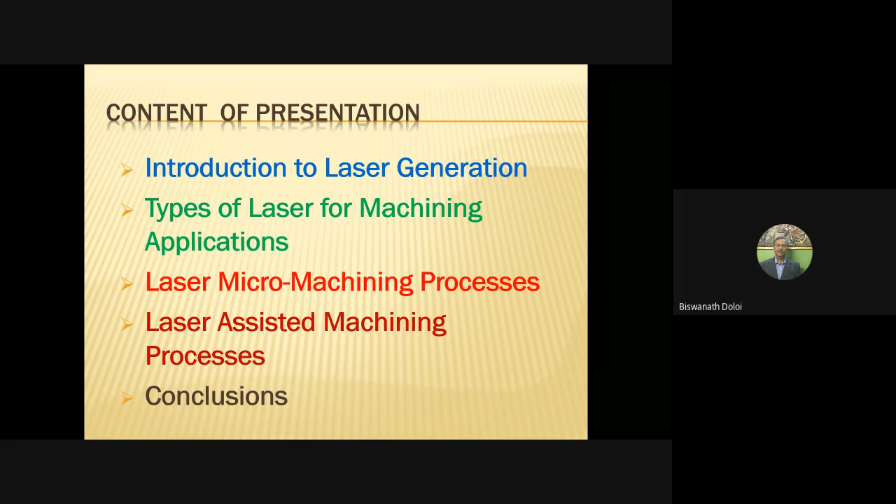So the topic of my presentation is recent advances in laser beam machining. Now, content of my presentation: first, introduction to laser generation, then I will discuss various types of laser for machining applications, and then various laser micromachining processes, laser assisted machining processes, and finally conclusion. Now I will discuss briefly the fundamentals of laser and laser generation.

So the full form of laser is Light Amplification by Stimulated Emission of Radiation. We know laser light is a beam of photons, and it is coherent and monochromatic, and highly directional, and it has high brightness with very high power intensity. A laser beam

is basically useful for machining purpose, and it is nothing but the emission of radiation, basically emission of photons, a beam of photons, in a narrow coherent beam which consists of a single wavelength in the visible, infrared and ultraviolet region of the spectrum. So laser may be IR laser, infrared laser, or ultraviolet laser. It is basically a coherent and monochromatic beam of photons.

Now, laser beam and ordinary light beam are different. Laser light is coherent and monochromatic in nature, but ordinary light is incoherent and emits in almost all directions, usually over a wide spectrum of wavelength. So laser beam is monochromatic, that means it has a single wavelength, but ordinary light emits over a wide spectrum of wavelength. So that is the difference. Ordinary light is not monochromatic, but laser light is monochromatic and coherent.

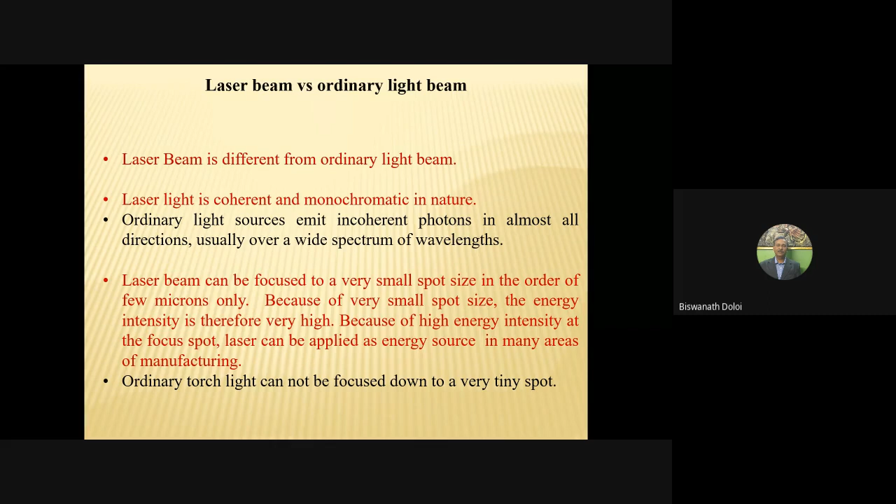But ordinary torchlight cannot be focused down to a very tiny spot. So if you want to focus the ordinary torchlight, then it will actually diverge. But the laser light can be focused over a long distance, and its angle of divergence is very, very less.

So if you go through the fundamentals of laser generation, there is some lasing medium which, when it is excited—excited means when it absorbs energy from a source of excitation—then it is excited and goes to the higher energy state, higher energy level.

At the higher energy level, the excited state, the lasing medium cannot stay for a long time. So after a certain time, it will go to the metastable state or ground state, and when it comes back to the ground state, it emits a photon, emitting energy in the form of photon. So the lasing medium may be different for different types of lasers.

For solid state lasers, neodymium, erbium, or ytterbium are the lasing medium. When this lasing medium absorbs energy, it absorbs it from the optical source or from the discharge energy, and goes to the higher energy level when excited. But when it comes back to the ground state, it emits energy in the form of photon. These emitted photons have a constant phase difference and are monochromatic. That's why it is a laser beam.

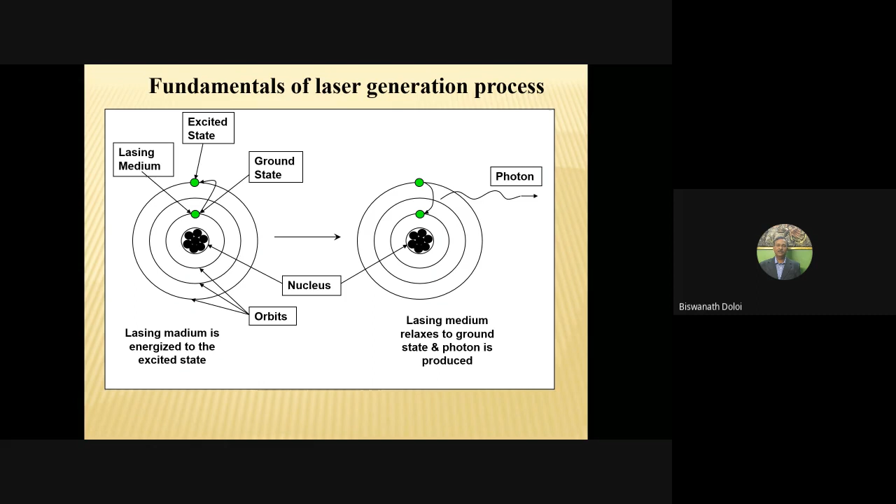So the fundamental principle of laser generation is almost the same for all lasers, whether it is a solid state laser or gas laser, but the excitation mechanism is different. All lasing mediums should be excited, otherwise you cannot get energy or a beam of photons with special properties, that is laser. Now if you want to apply this laser for machining applications, what are the requirements?

Laser is generated, but it should be moved between two mirrors. This is basically the optical resonator. One is a fully reflective mirror with 100% reflectivity, and the other is a partially reflective mirror. This beam of photons oscillates between these two mirrors, its energy increases, and finally it comes out from the partially reflective mirror, and then it is focused by means of a lens.

The lens is mainly used for focusing purposes. If you focus it, the spot size at the focal point is very small, and the energy per unit area, that is the energy intensity, is very high. This laser beam should be focused on the workpiece surface to utilize its energy.

For machining applications, you have to move the workpiece along the XY direction, and for focusing purposes the lens can move along the Z direction. The workpiece is placed on an XY table, controlled by a CNC controller. So this is the laser generation as well as the machining system, but the lasing medium may be different, or the source of excitation may be different.

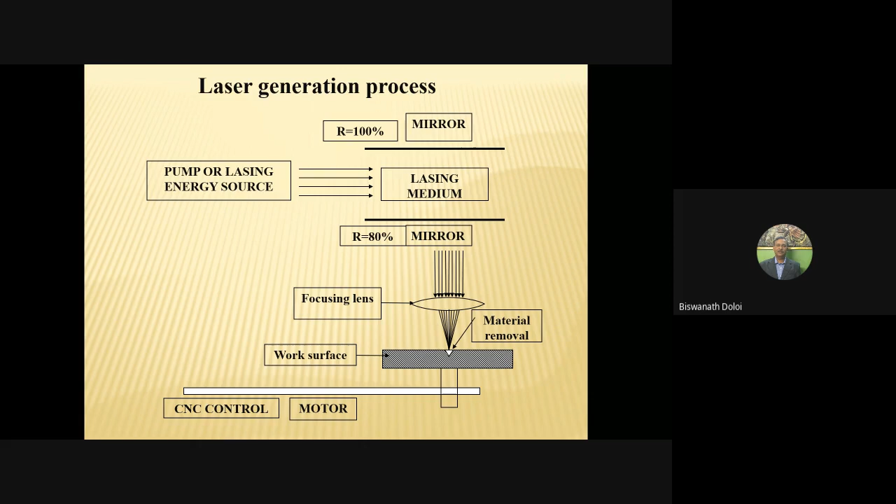This is basically the solid state laser, but for gas lasers electrical discharge is required between the anode and cathode, and from there the energy is utilized to excite the lasing medium. For CO2 laser, CO2 gas molecules are to be excited, and for that you require a discharge cell, electrical discharge cell, cathode, anode, etc. I will discuss this later.

Now if we quickly go through the background of laser generation: in 1917, Einstein showed that lasing action should be possible in his paper on the quantum theory of radiation.

Gordon Gould was the first person to use the word laser, in 1959. He is the person who uttered this term, laser. In 1960, Dr. Theodore Maiman invented the first ruby laser. This is the solid state laser.

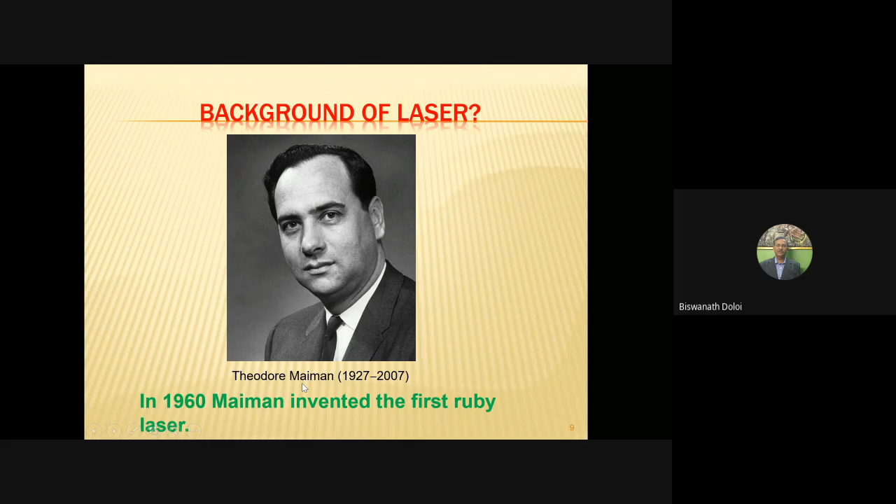Thereafter, a lot of development happened in the late 70s: YAG lasers with power in the order of 100 watts, and the CO2 laser. This CO2 laser was developed by Dr. C.K.N. Patel at Bell Lab. CO2 laser has high power, 1000 watts.

In 1970, the first continuous wave diode laser was developed, with less power. This semiconductor diode laser is used in printers as well as in pointers, also developed in 1970. Then in the late 1980s, fiber laser technology was available using erbium doped single mode fiber. Erbium is the lasing medium here. For CO2 laser, CO2 gas molecules are the lasing medium. For Nd:YAG laser, Nd, neodymium, is the lasing medium.

Lasing mediums are different, and gradually lasers are no longer treated as laboratory research equipment. Laser manufacturing has become a multi-billion-dollar industry. Gradually laser is applied in many fields of manufacturing, such as inspection, measurement, testing, medical device fabrication, material processing, and surface treatment of diverse range of materials, from plastic to diamond, metal, glass, ceramic, composite. All materials can be machined or processed by laser, and the list of applications is endless.

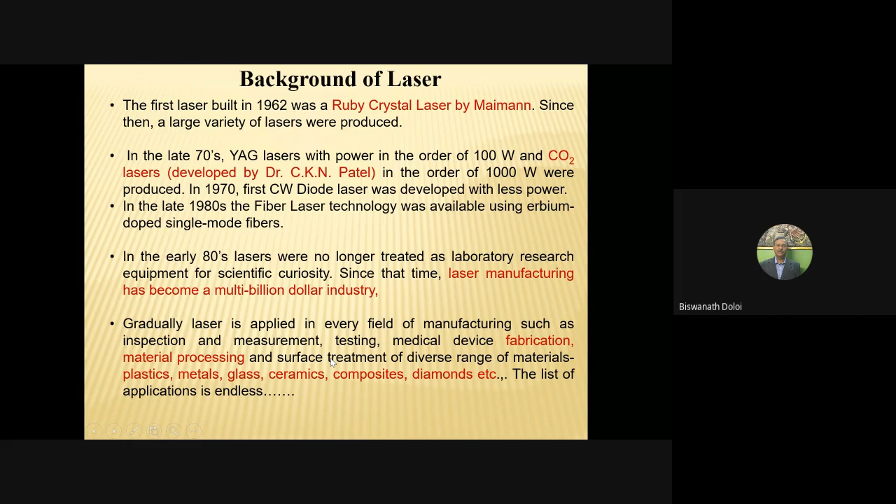Now, for different manufacturing applications, we require different laser beam intensity. As I told, laser intensity means laser power per unit area, watt per centimeter square.

For machining, you have to melt the material and vaporize the material, so we require high power and high power intensity. For machining, we require 1.5 multiplied by 10 to the power 6 to 1.5 multiplied by 10 to the power 8 watt per centimeter square, that is 10 to the power 6 to 10 to the power 8 watt per centimeter square. Here, melting and vaporization, sometimes laser ablation, means you directly vaporize without melting. The energy intensity is so high that some materials are directly vaporized from solid. So without melting, the vaporization of material from solid, that is laser ablation, which is also a material removal mechanism when you are machining or removing material.

So for machining, we require high power intensity. But for welding, where we are not removing the material but joining it, the materials are in the same molten state. For that, we require comparatively less power intensity, that is 1.5 into 10 to the power 4 to 10 to the power 5 watt per centimeter square.

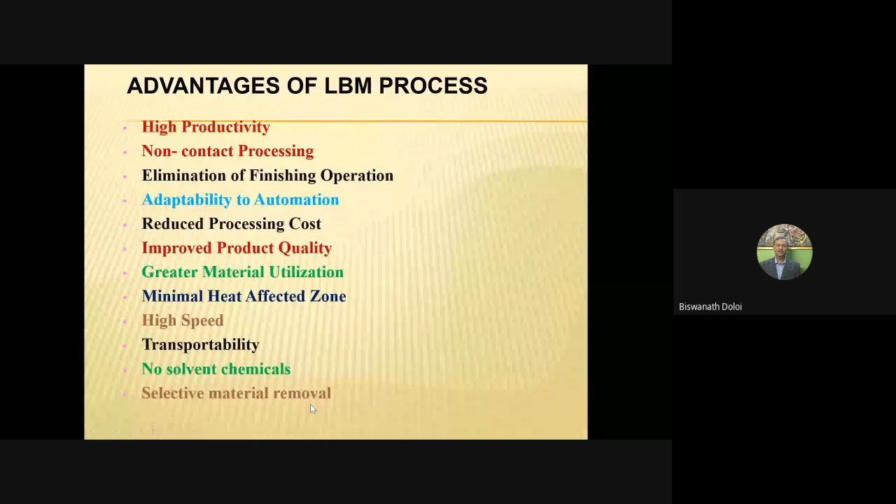So these are the advantages of laser beam machining. Now these are the general applications.

So it can cut very hard material like diamond. So diamond jewelry industries, laser machine is applied. Then it can be useful for fabricating IC or printed circuit board, and it can be used for processing nuclear fuel rod, cutting of nuclear fuel rod.

Then non-machining application like welding is also another application, and it has wide application in pointer, printer, plotter, etc. Now medical device fabrication, laser has wide application, cutting of stent, fabrication of stent, marking on stent. So laser has wide application in medical industry.

Now, as I have told you that laser beam is a source of energy, so it can be applied for heat treatment, surface hardening, alloying, cladding, cleaning, etc. And I will mainly focus on micro machining applications, micro drilling, micro cutting, micro grooving, micro turning, thread cutting.

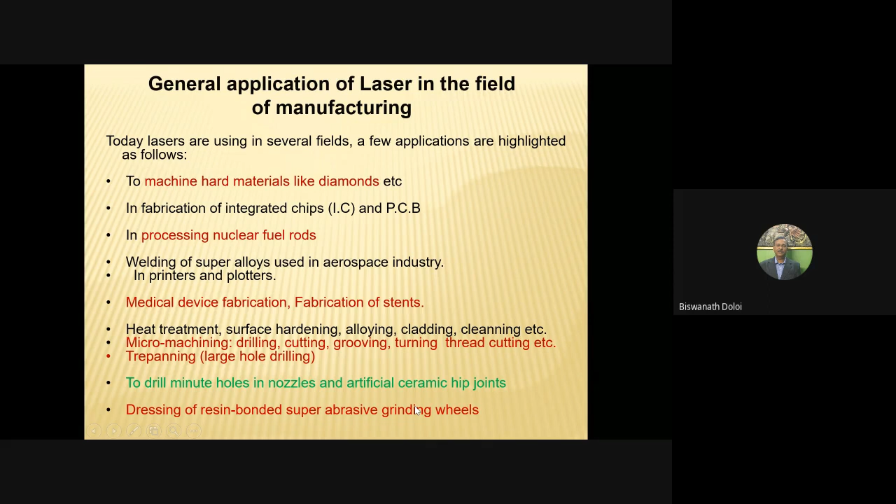Not only for micro hole generation, it can be useful for large hole generation, that is trepanning. And it can be applied for drilling minute hole in nozzle, fuel nozzles, and also it can be useful for turbine cooling hole, etc. And artificial ceramic hip joints, it has wide application. And it can also be applied for dressing of grinding wheel. So these are the general applications in the field of manufacturing, machining, as well as non-machining applications.

Now, material removal mechanism. So for laser beam machining, the laser radiation is first absorbed by the material surface. So material should absorb the laser energy. Otherwise, it will be useless. So the material should absorb the laser radiation, or it should absorb the energy of the laser beam. Then only its temperature will be increased. And if the temperature is above the melting point, then it will melt and then it will vaporize.

So melting vaporization is the mechanism for long pulse laser, that is microsecond pulse duration laser or millisecond pulse duration laser. Now here another thing is very important, that the thermal properties, absorptivity, reflectivity, transmissivity, these properties are very, very important. As laser beam machining is an advanced non-traditional machining process, here mechanical properties are not important. Mechanical properties, say ductility, toughness, etc. of the material are not important.

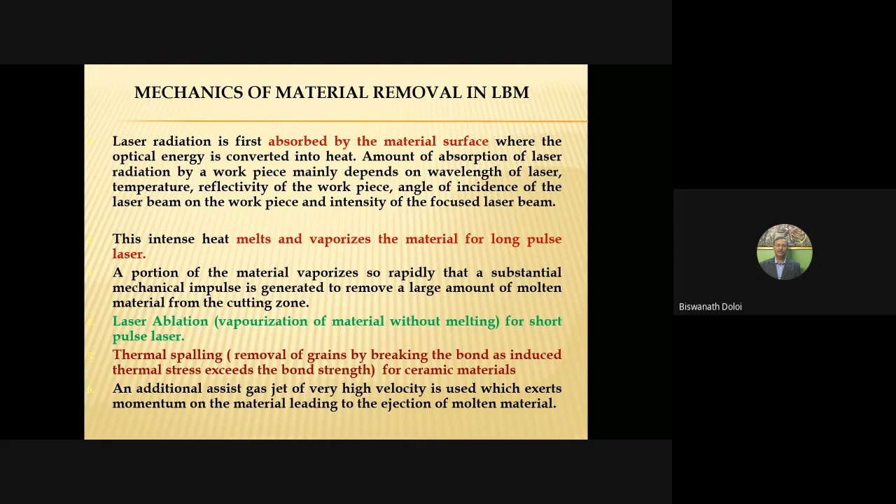To avoid this, when the material is melted, it should be immediately removed. So for that we supply the assist gas jet. These are the material removal mechanisms: mainly melting, vaporization and ablation, and for ceramic, thermal spalling.

Now here you see, this is machining with long pulse laser, where the pulse duration is long, millisecond or microsecond. Then there is melting, so a lot of thermal related problems occur: micro cracks, heat affected zone, damage to the adjacent layer, recast layer, resolidified layer. So this is not desirable.

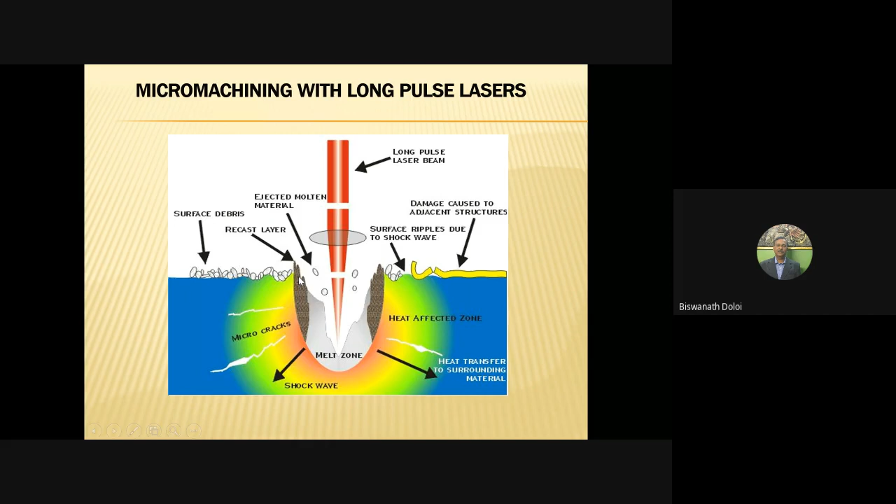But if you go for a very short pulse laser, the pulse duration is very short, but the energy intensity is very high, peak power is very high, because there is a relation that peak power equals average power divided by the product of pulse frequency and pulse duration. So if the pulse duration decreases, peak power increases, meaning gigawatt range, kilowatt or gigawatt, megawatt or gigawatt range.

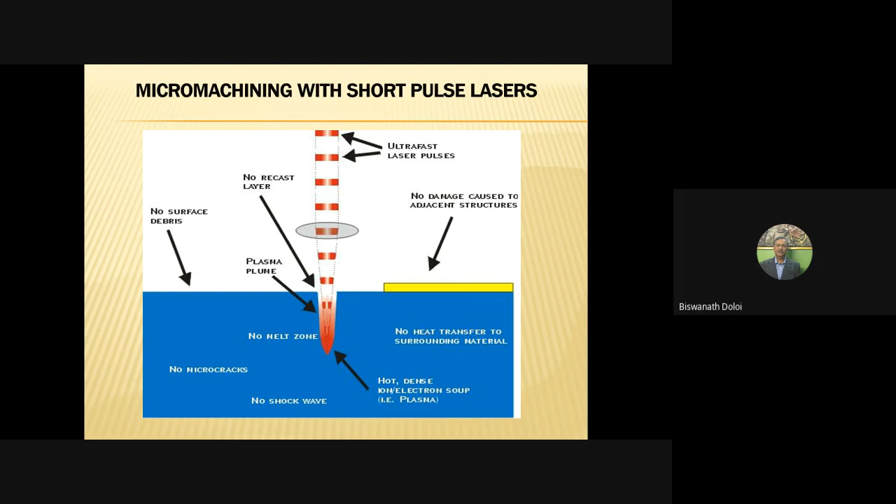So gigawatt range power for very short duration, nanosecond or picosecond or femtosecond, means there is no time to melt - directly the solid is vaporized. So no melting means no melt zone, no micro crack, no thermal damage. All the problems are eliminated when you are using a short pulse. So selection of laser is very important when going for machining, especially micro machining applications.

Now I will discuss different types of lasers. Nd:YAG lasers - Nd means neodymium, this is the lasing medium, doped in YAG crystal, yttrium aluminium garnet. This laser has excellent properties like high peak power, good focusing characteristics, small pulse duration and small wavelength - here wavelength is 1064 nanometer. This is a solid state laser, and it can be transported by fiber optics cable.

This laser system integrated with CNC control has great potential for wide use in machining applications. So we are mainly focusing on machining application. Nd:YAG laser can be used for micro drilling, profile cutting, marking - marking is by removing the material, basically marking by machining.

And groove, micro grooving - you can produce a groove of micron width or micron depth. And then turning, laser turning, so you can remove a thin layer or micron layer of material from the cylindrical workpiece. That is laser turning.

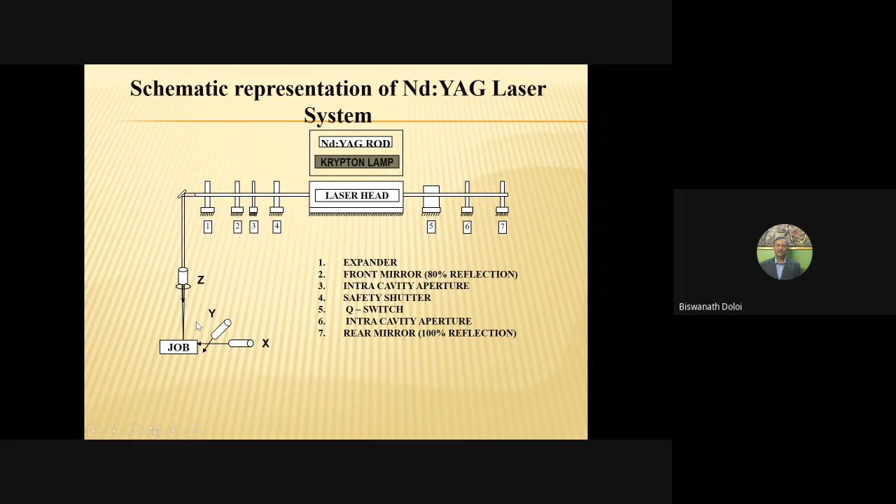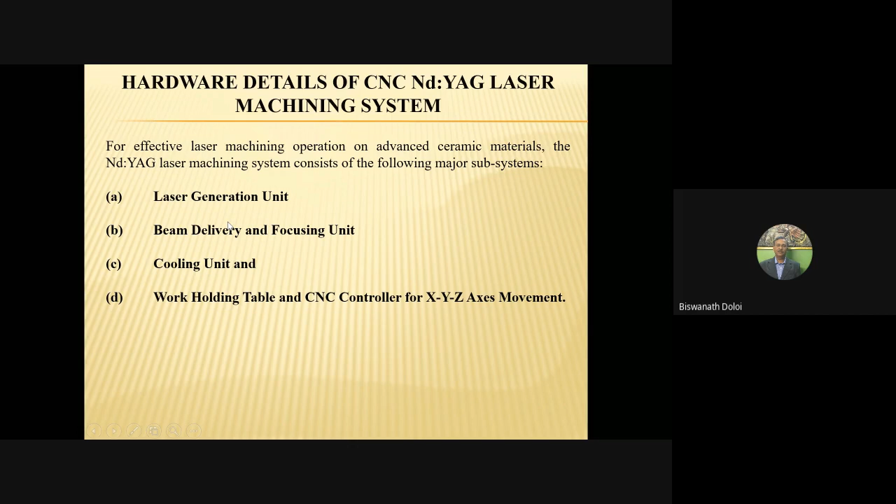Now every system has this type of arrangement: laser generation unit, then beam delivery, beam bender or focusing unit, and cooling unit. Sometimes for high power laser we require a water cooling system; for low power laser we require an air cooling system. And work holding table, CNC controller for X, Y, and Z axis movement. These are the requirements for the CNC laser machining system.

Now for laser generation, this is actually that lamp pumped laser generation system. So Q switch is there for pulsing, and this is a Krypton arc lamp controller. It will control the average power, and we can control the pulse frequency. For this system, pulse duration is fixed at 120 nanoseconds.

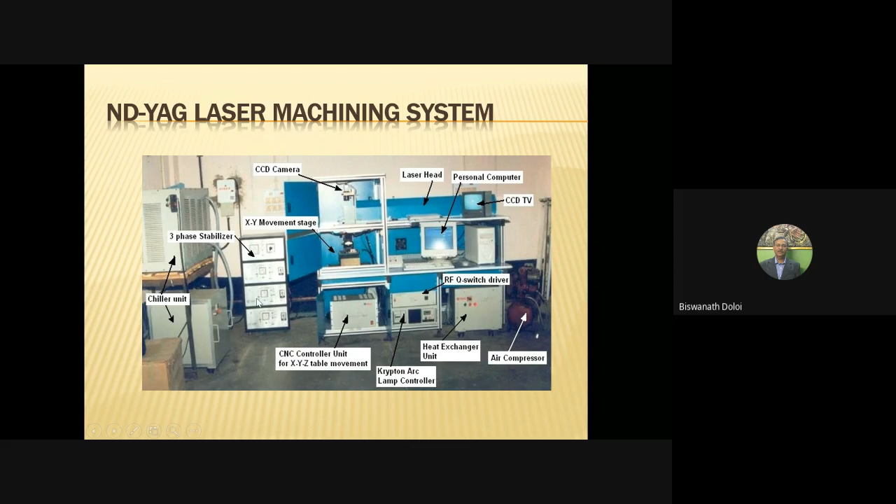Now applications. As I told, material processing - different types of material processing, material removal also for a wide range of engineering materials. So it may be plastic, PMMA, polymethyl methacrylate, or it may be diamond or metal, any kind of material, glass.

Now, fabrication of medical devices. I'll show some slides for cutting of stent, cardiovascular stent - this Nd:YAG laser system can be useful, or for making some complicated micro features on the medical implant, we can use this laser beam machining. Marking is also one of the applications.

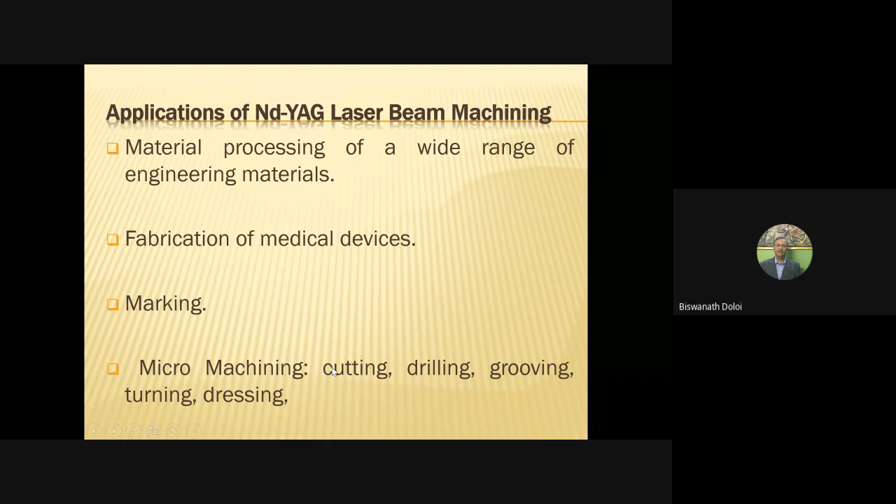Marking by machining. Marking may be of two types. One is by surface modification, by removing the material. So laser beam machining can be applicable for marking by removing the material. Then micro machining, micro cutting, micro drilling, micro grooving, micro turning, dressing, etc. Now CO2 laser system.

So in the CO2 laser system, as I told initially, electrical discharge is the requirement as a source of excitation energy. Carbon dioxide molecules are used as the lasing medium, so CO2 molecules absorb the energy.

Other gases are also used: helium is used for cooling purpose because there is cold emission, and nitrogen is used as a charging gas. Nitrogen transmits the energy to the CO2 molecules. So we call it a CO2 laser system, but other gases are required.

Carbon dioxide gas is the lasing medium, but nitrogen and helium gases are required. You have to produce a discharge cell, and for that you require a cathode, anode, and two mirrors. These two mirrors are required for all laser generation because they make the optical resonator: a full mirror means 100% reflectivity, and this is a partially reflective mirror. Then finally the laser beam comes out.

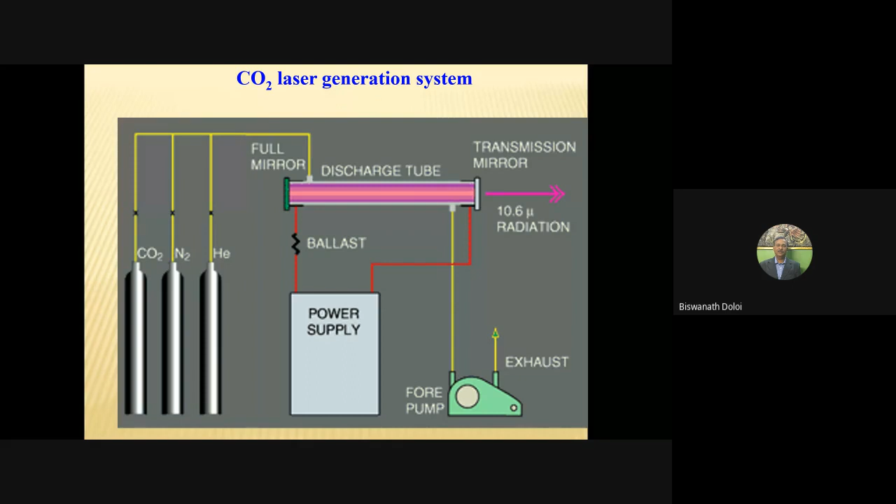As I told, in the CO2 laser system carbon dioxide gas is 10%, nitrogen is 30%, used as a charging medium, and helium is 60% as a coolant. Nitrogen molecules can be charged by means of high voltage DC or radio frequency charging, and here the efficiency is 10 to 15%.

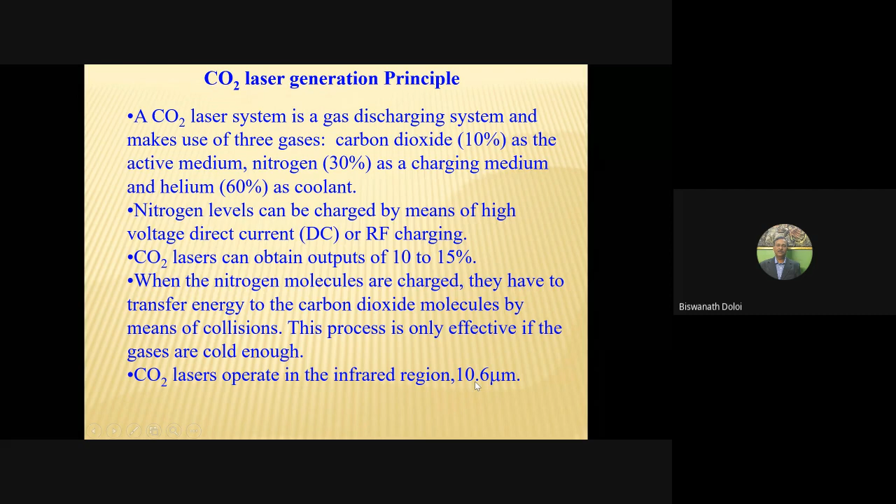Nitrogen molecules are charged and they transfer energy to the carbon dioxide molecules, which absorb the energy. This is the lasing medium and it emits the laser beam in the IR infrared region, with wavelength 10.6 micron. Now this is the photographic view.

This CO2 laser can be absorbed by our human cells, that's why CO2 laser is useful for surgical applications. It can be absorbed by water-based compounds and by biological tissue, so it has wide application in the biomedical field: laser surgery, skin resurfacing, laser facelifts, etc.

CO2 laser can also work well on wood cutting, acrylic, plastic, and many other applications. These materials can absorb CO2 laser, and it can also be used for metal machining, marking on stainless steel, coated materials, etc.

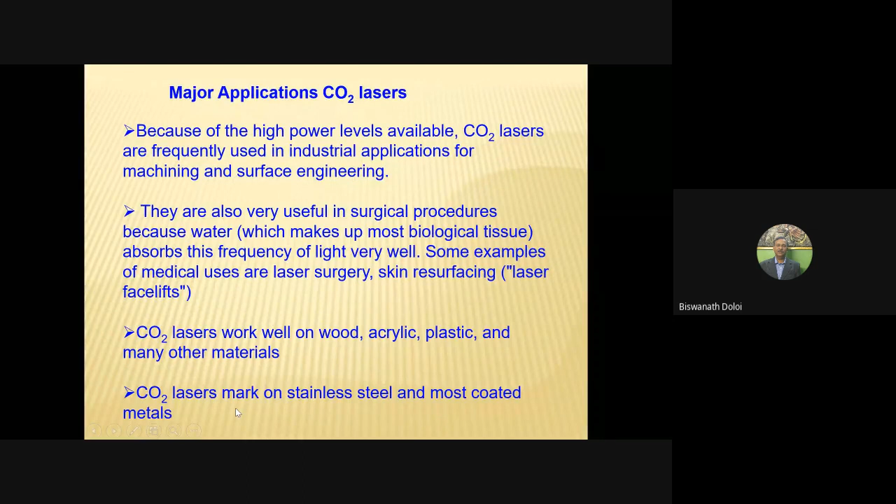Now, the fiber laser is an IR laser, similar to the Nd:YAG laser, but the lasing medium is doped in a fiber optics cable. It has different core layers, an inner core and outer core. This inner core is ytterbium doped; ytterbium, YB, is the lasing medium, and it has an outer cladding also.

So this fiber cable has different layers of coating, and there will be a requirement of two mirrors also. This is the source of excitation, which may be diode pumped or lamp pumped, and then there are two mirrors, and finally this laser beam comes out.

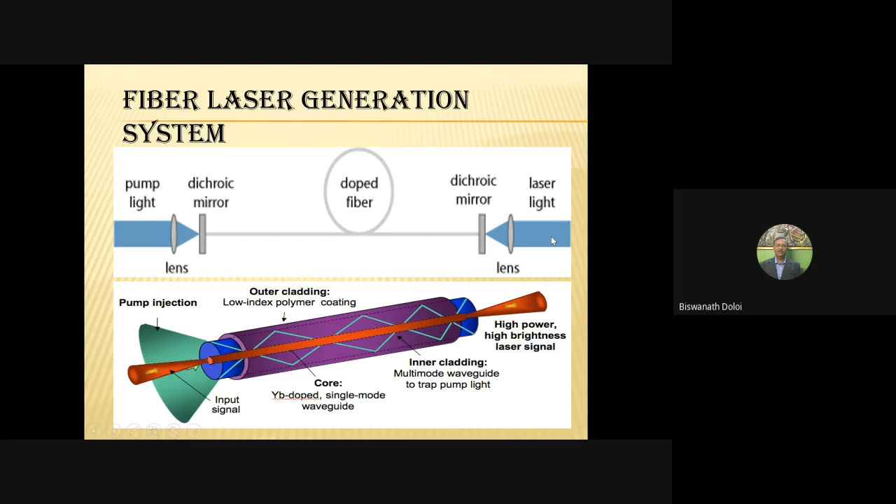The fiber laser is a solid state laser, as I have mentioned. Wavelength is similar to Nd:YAG laser, 1064 nanometers, and ytterbium atoms act as the lasing medium. Diode laser is used as the pump source, so it is a diode pumped fiber laser, used for machining applications, where pump radiation is launched into the fiber core and gradually absorbed over the fiber length and converted into laser radiation.

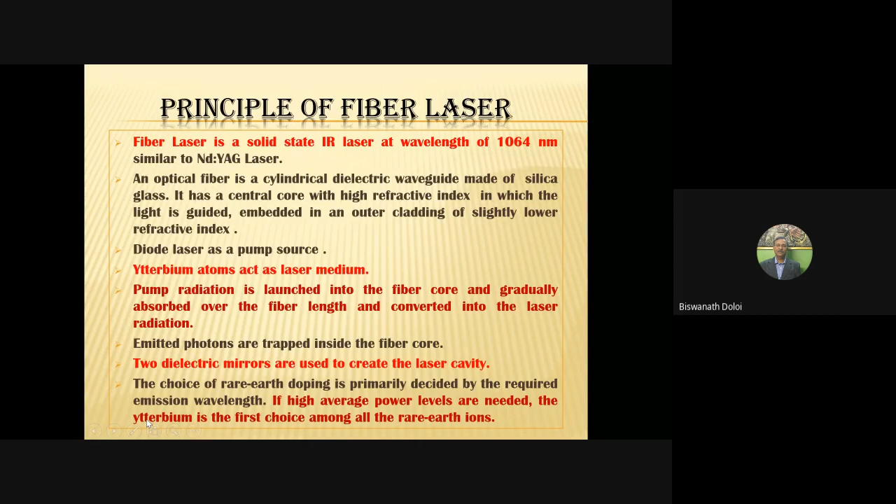The optical fiber is a cylindrical dielectric waveguide made up of silica glass, and two mirrors are there to make the laser cavity, as I told. If you require high power laser, you have to use ytterbium, or erbium can also be used, but for high power you require ytterbium as the lasing medium.

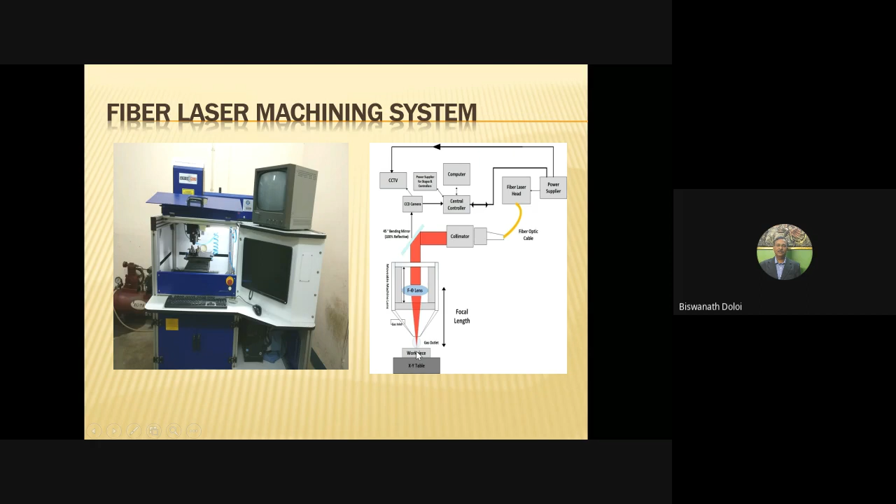Here you see the beam diameter, input diameter is large, about 9 millimeter, but after focusing, the spot diameter is 20 to 21 micron. So this is the speciality of the laser beam, you can focus down to a very teeny spot of 20 micron. This can be useful for micro machining, micro drilling, micro cutting, etc.

Now this is the laser head. This is CCTV, closed circuit TV, and CCD camera is there. CCD camera is mainly for focusing purpose, whether it is perfectly focused or not, that means the spot is on the workpiece surface or not.

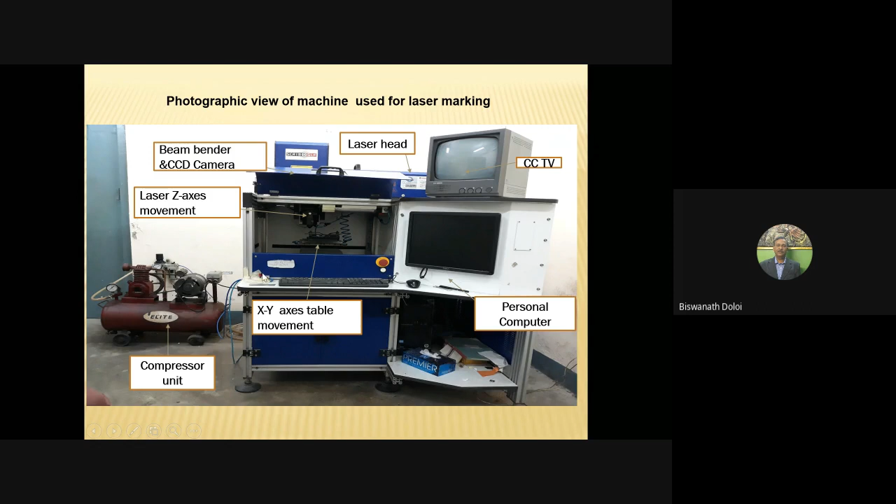And then laser Z-axis movement for moving the lens or focusing, and then XY table movement for moving the workpiece, and then it is connected, integrated with the PC, and this is the compressor to supply the air. Air is used as assist gas.

Now another laser, that is the excimer laser. This is also a gas laser, derived from the excited dimer. In this case, two gases are used: one is halide gas, fluorine or chlorine, another is rare gas, argon or krypton. So one combination you can consider is argon and fluorine.

In this laser generation system, when two gases, argon and fluorine, are excited by absorbing energy from electrical discharge, an excited dimer is formed, that is the excimer, excited dimer, ArF. But at this excited state, this excited dimer cannot stay for long time. These will be separated, and when they are separated, they emit energy in the form of photons. This beam of photons has special characteristics: constant phase difference and single wavelength. So that is the laser.

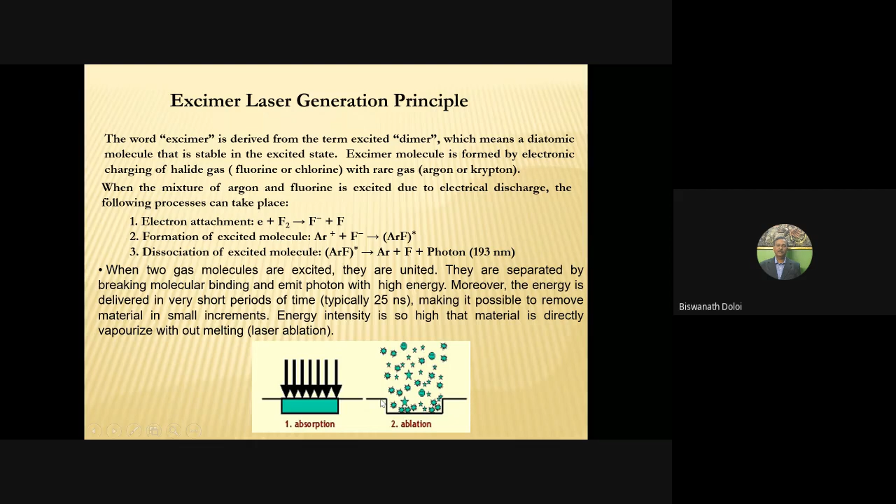Now for different combinations, you can get different wavelength lasers: argon fluorine gives 193 nanometer, krypton fluorine 248 nanometer, xenon chlorine 308 nanometer, xenon fluorine 351 nanometer. So all are excimer lasers, but with different wavelength.

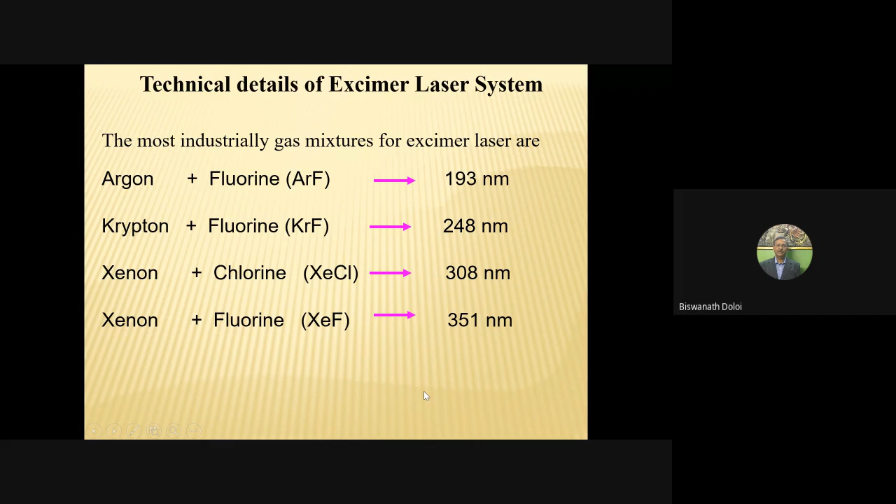Now another laser that is very common and cheaper, the diode laser. We frequently use it in pointers, torches, or other applications. As a source of excitation, diode laser is used, that's why it is diode pumped laser. But this diode laser itself can be applied for machining when it is with high power.

Very high energy efficiency, greater than 50%, this is the main advantage. In case of Nd:YAG laser, efficiency is below 5%. For carbon dioxide laser, 10 to 15%. But for diode laser, efficiency is very high, more than 50%. And it is portable, compact, more reliable, less maintenance. Air cooling is sufficient, water cooling not required, less heat affected zone, better surface finish.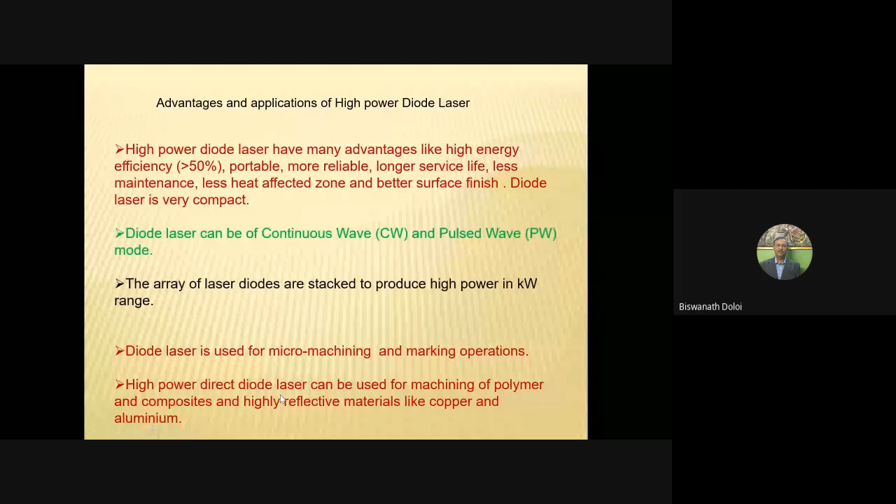Now I will discuss about the various laser micromachining processes.

So I have discussed about the different types of laser for machining applications.

Now, laser micromachining processes. Micromachining, as we know, has a dimensional range less than 1 millimeter. So 1 to 999 micron is the micromachining range, but the acceptable range for micromachining is 1 to 500 micron. Micromachining is becoming day by day more popular for fabrication of micro components.

So there are two things: one is to create micro features on the macro or millimeter dimensional component, that is micromachining. Or you fabricate the micro component, meaning the thickness of the sheet is at the micron level, making a large hole but on a micro thick component, that is also micromachining. So micro plus machining.

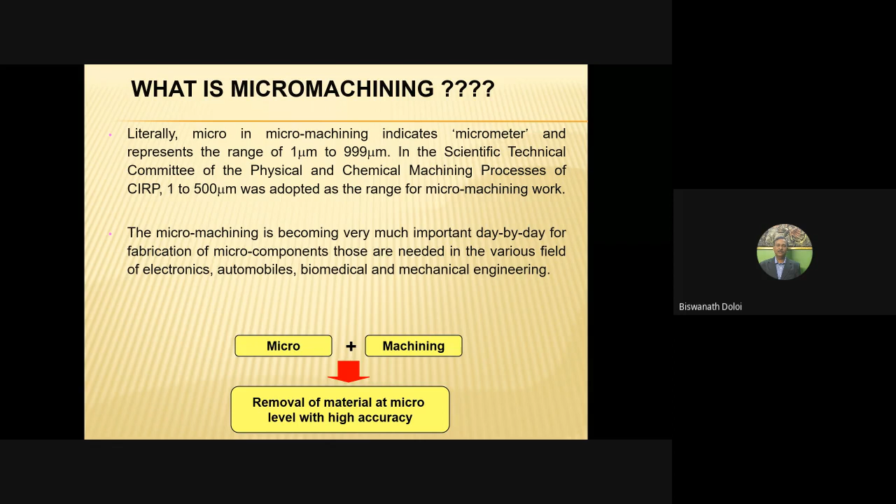Now if you consider different components: dimensional range, nano level is 1 nanometer, micro is 1 micrometer, meso means in between macro and micro, and macro dimension is 1 meter, that is 10 to the 9 nanometer, and meso means millimeter. So if you want to produce a cardiovascular stent, the size is millimeter, but you have to produce micro features like micro grooves on that millimeter dimensional component, so you require micromachining.

For making the micro component also you require micromachining. It has wide application in micro electromechanical systems, MEMS, and IC chips, etc. These are different products, and nowadays you have to use very light components and make productive use of material. So with the development of smart materials, the size is reducing, and so the size of the features to be created is also reducing.

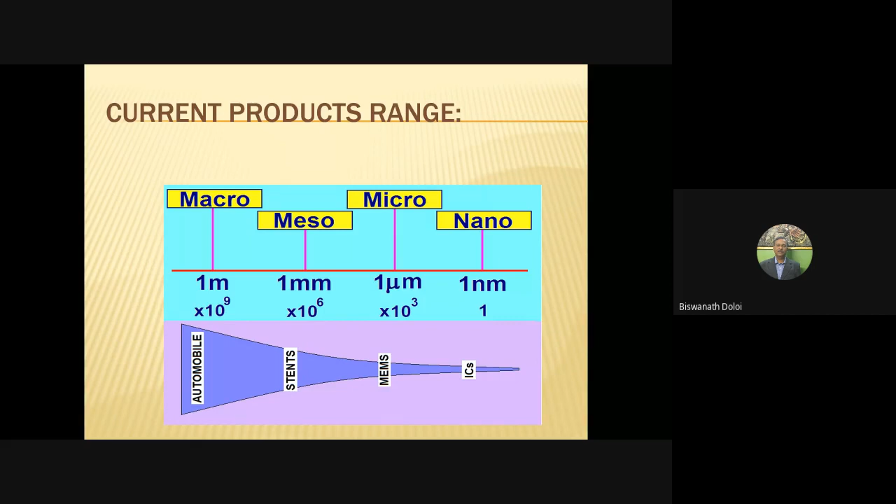So you have to produce various micro features on the micro component as well as the meso component. So for that, micromachining. Now here you see for laser beam micromachining.

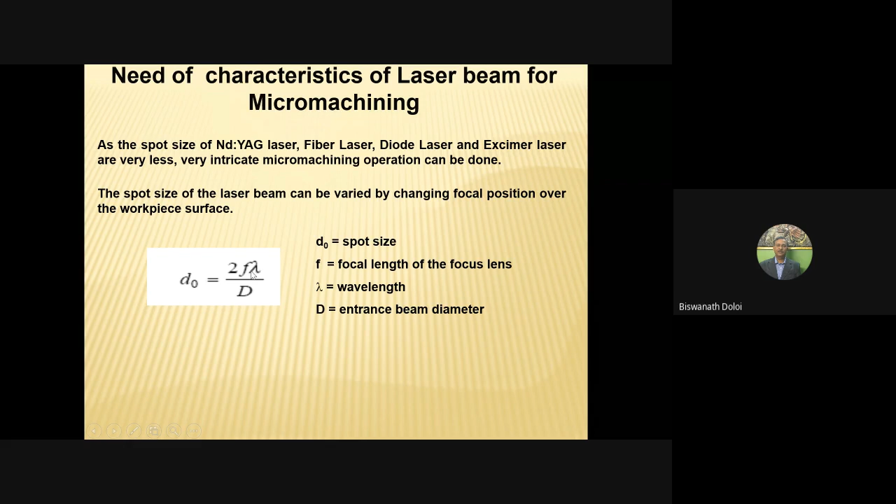This is very important, as I told, the spot size. The spot size should be in the micron range, and there is a relation: spot size D0 equals 2f lambda by D, where D is the entrance beam diameter and lambda is the wavelength. So you have to select the laser for micromachining whose wavelength is very less, then the spot size will be less. For a particular system, the focal length is fixed.

There are different micromachining applications in the area of microelectronic packaging, semiconductor manufacturing, data storage devices, medical devices, communication and computer peripherals. Different types of lasers can be used, mostly diode pumped solid state laser, fiber laser or Nd:YAG laser, or lamp pumped solid state laser, lamp pumped Nd:YAG laser, fiber laser, excimer laser, and CO2 laser sometimes we use.

Applications include micro drilling, micro turning, and for medical applications, catheter hole drilling, stent fabrication, orifice drilling, for different micro components, micro parts, and materials like plastic, ceramic. For excimer laser, you can apply it for plastic, ceramic, silicon. There are different materials that can be processed by laser: metal, ceramic, plastic, diamond, glass, silicon. So from soft to hard material, the laser can be applied.

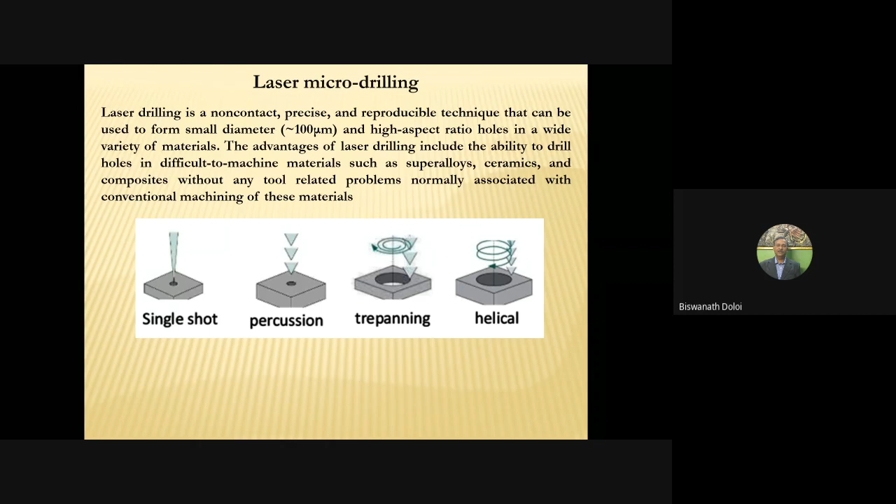A micro hole with high aspect ratio can be performed by laser drilling operation. Now we have done some experiments on alumina, a very hard material.

This type of hole you can produce - a taper hole. Obviously this is a drawback for laser beam machining, although you can focus it at different levels to make a straight hole. But if you consider the fixed focusing condition, then taper hole is observed.

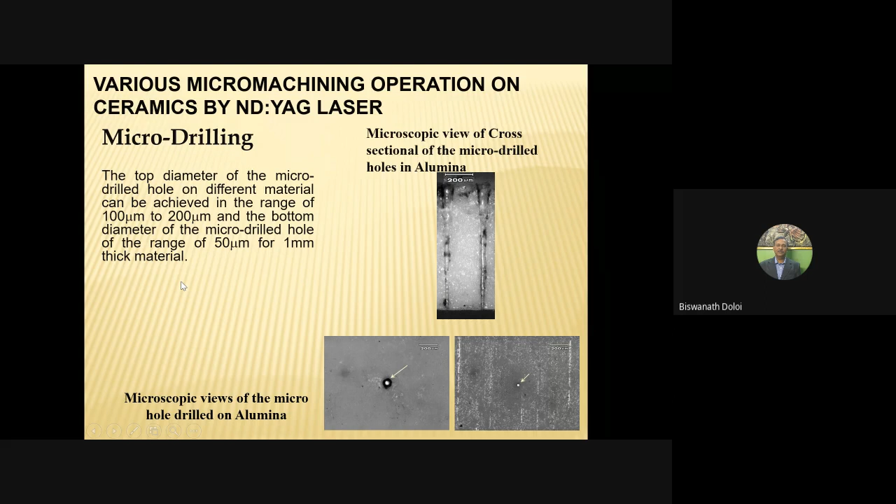Here top hole size is 100 micron, bottom is 50 micron, and thickness is 1 millimeter. So taper hole - sometimes we require a taper hole, so for that you can apply laser micro drilling. This is the hole drilled by excimer laser.

50 micron thick polyimide sheet and 55 micron hole is drilled - array of inkjet nozzles. For inkjet nozzles you require an array of holes, size 55 micron, thickness 50 micron. That is done by excimer laser and material is polyimide.

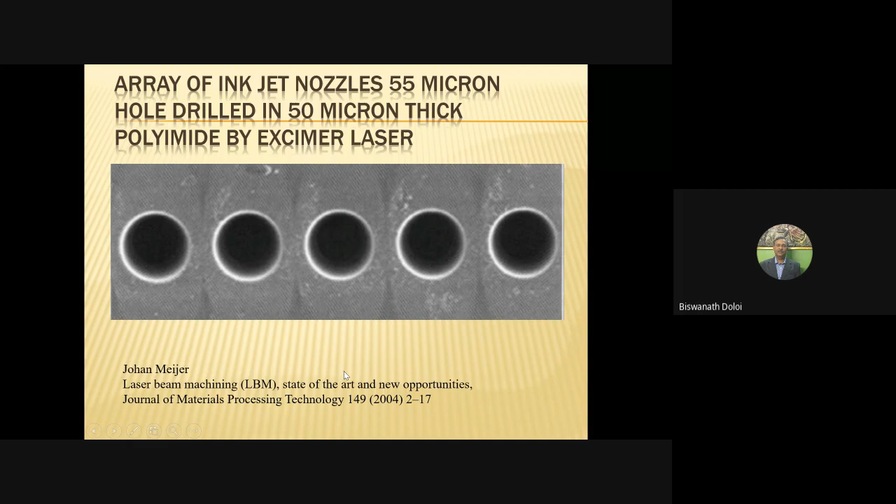You can refer this journal. Now cutting - if you compare with other types of cutting, laser cutting with plasma cutting, flame cutting, water jet cutting etc., laser cutting plays an important role. Laser cutting has excellent performance so far as surface finish is concerned, and cut width is also very less, in micron range. Then contour shape - laser cutting with the help of CNC control system, you can cut any kind of shape.

Different materials, as I told, it can be applicable from plastic to diamond, but investment cost is high, so performance is poor in that aspect. You can compare with plasma cutting, flame cutting, water jet cutting, but in various aspects laser cutting has very excellent, very good performance.

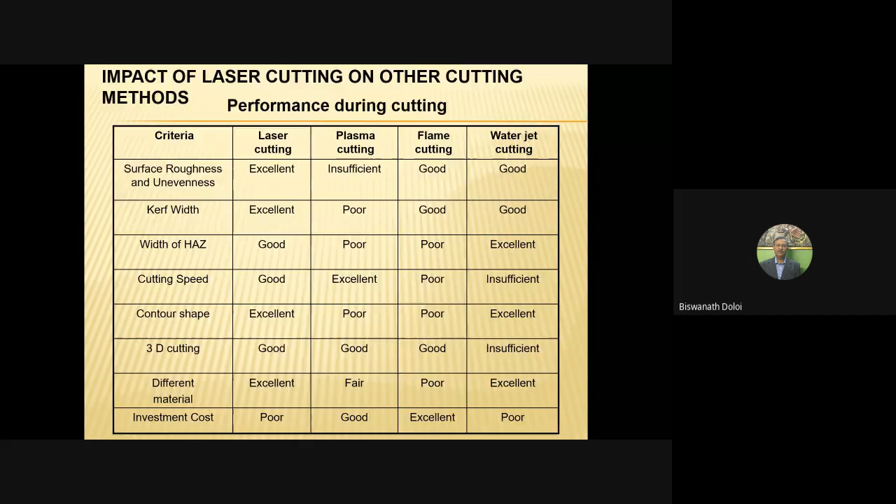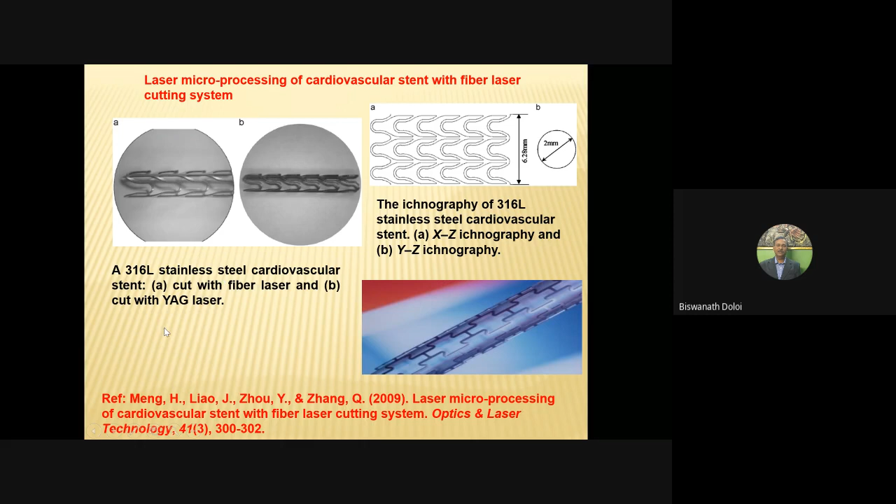Average power is 30 watt, pulse frequency 50 kilohertz, and number of passes 8. Here scanning speed is very high - cutting speed 40 millimeter per second, and thickness of the workpiece material is 1.1 mm. This is the Ti6Al4V sheet.

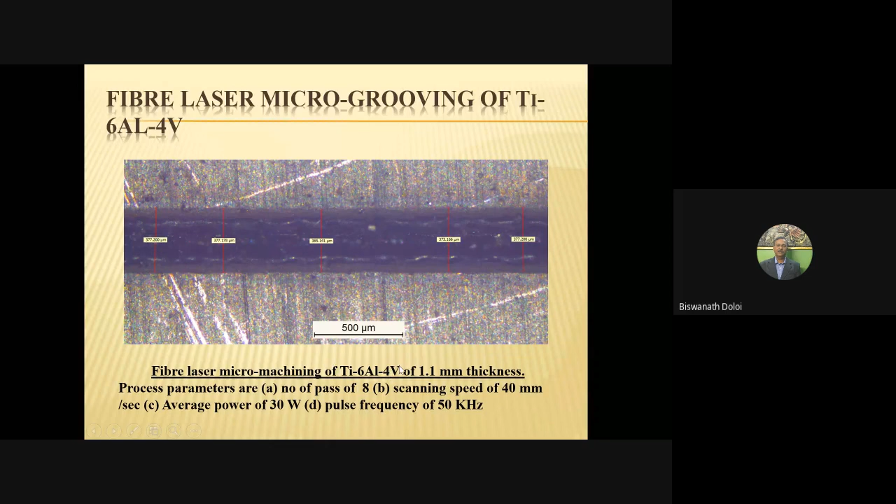Now this is polymeric material, as I was telling - PMMA, polymethyl methacrylate. This type of micro channel we can produce by using Nd:YAG laser.

Here you see these are the process conditions - lamp current. This is a lamp pumped Nd:YAG laser system, so lamp current is 14.5, pulse frequency 2.1 kilohertz, pulse width 12.8% duty cycle, and air pressure. Since it's a polymeric material, we are using air as the assist gas.

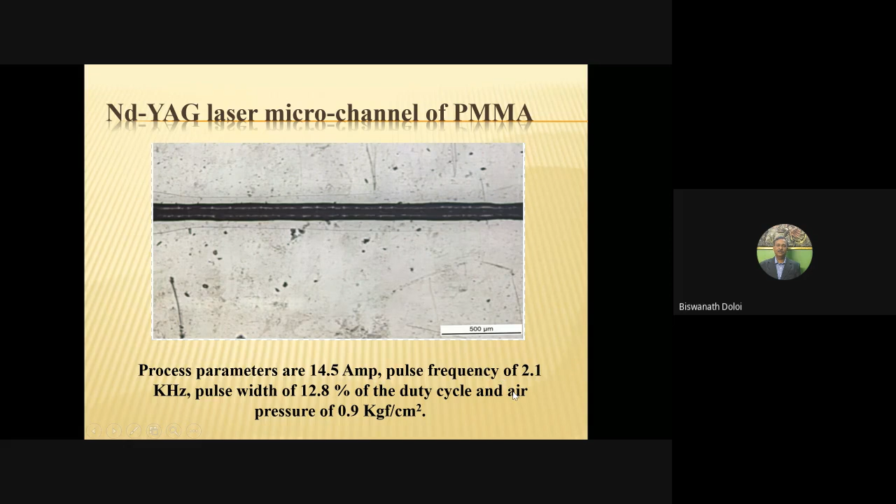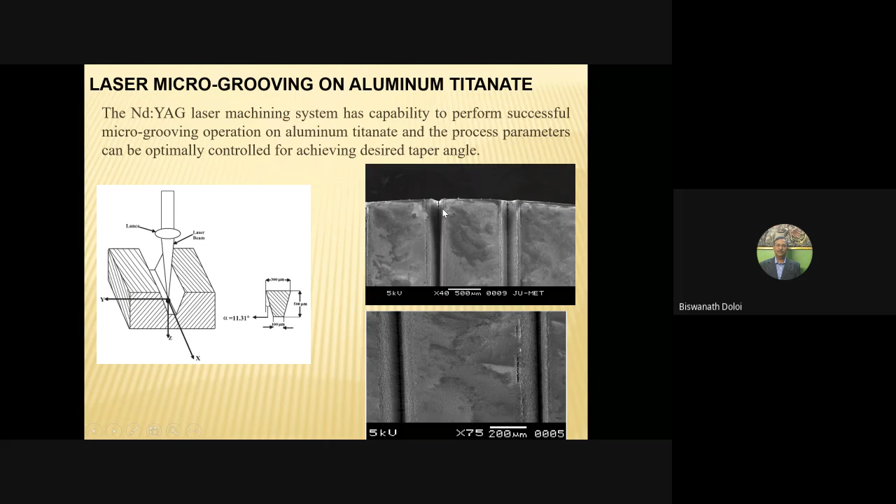Now aluminum titanate - this is one of the important materials used for automobile industries. So this type of trapezoidal groove you can fabricate - 300 micron width, 100 micron bottom width, and 500 micron depth. This type of trapezoidal groove we can fabricate by laser grooving.

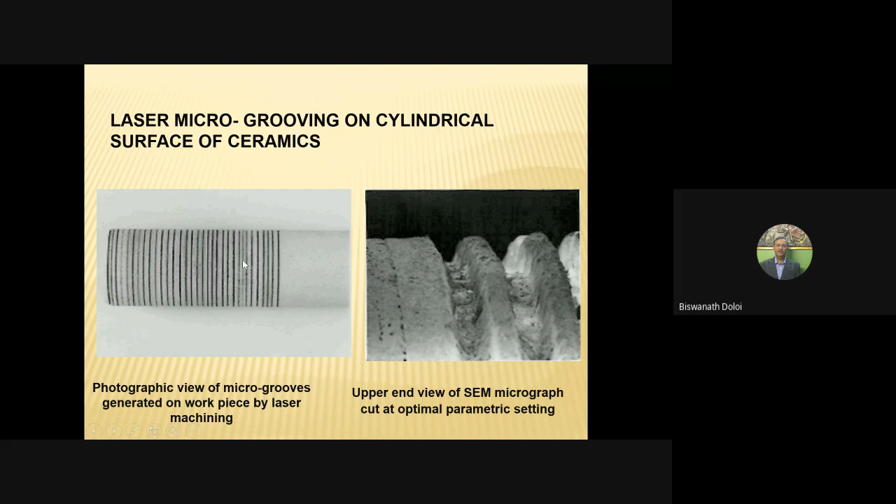Now this is on alumina - this type of groove on alumina, a ceramic material. This is the groove which is generated on ceramic, on a cylindrical surface. You can produce this groove on a cylindrical surface - micro groove on cylindrical surface.

Now this type of ramp, and this type of microfluidic channels - these are microfluidic channels, these are the walls, micro channel, and these are the ramps. This type of micro feature, required for microfluidic applications, can be generated by excimer laser.

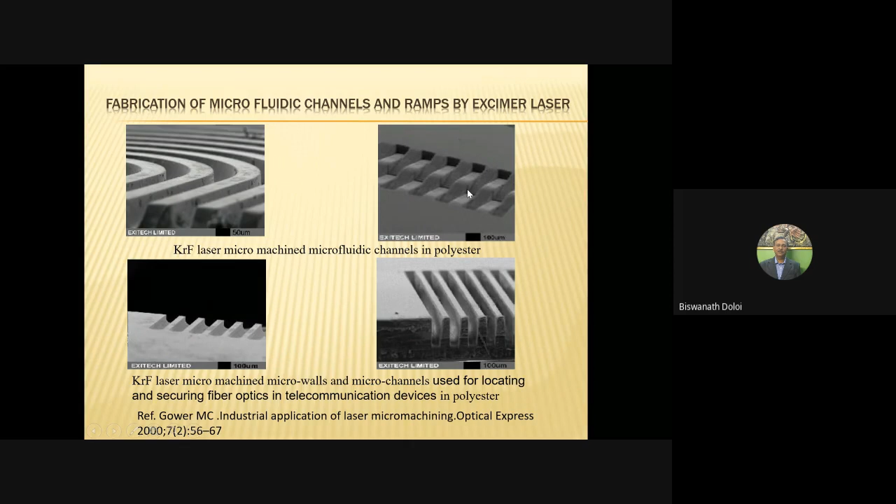So this is applicable for telecommunication devices. This type of application, micro features applied for microfluidic as well as telecommunication devices, excimer laser can be applied.

And three-dimensional laser micro machining, where we can remove bulk of material by using single laser beam or multiple laser beam. So two laser beams intersecting at 90 degree or less than 90 degree. So two laser beams can cut the material and chunk of material can be removed at a time.

So bulk machining. Because in laser machining, the machining rate is less, but if you want to remove the bulk of material, then you have to apply two intersecting laser beams. This is for three-dimensional laser machining. But single laser beam can also be used, similar to milling. You can make the groove.

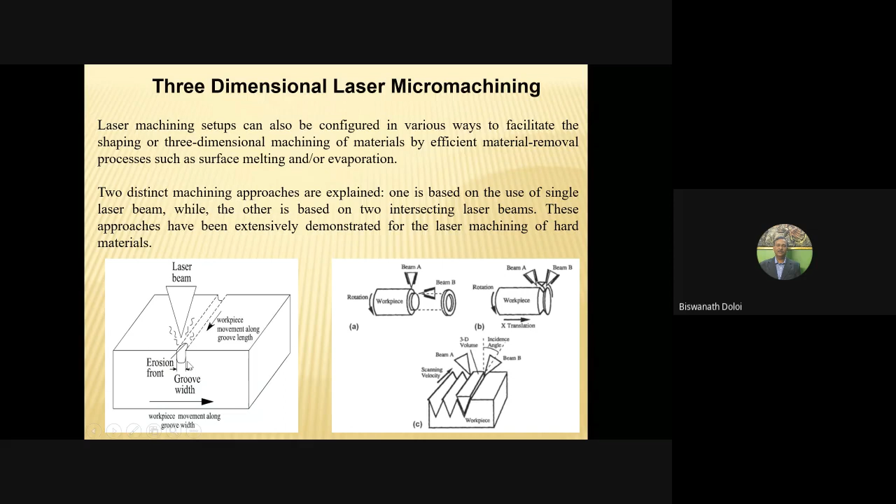Now laser micro turning. We have done a lot of experiments in this area. Here the workpiece is cylindrical, it is rotating with respect to this particular axis, and it is also moving along the axial direction. But laser is fixed, and it will remove a thin layer of material from the cylindrical surface.

In case of conventional turning, we use a single point cutting tool, but here we are using a laser beam, and the workpiece is rotating as well as moving. We are giving the feed by moving the workpiece along this direction. So a thin layer of material is removed.

Now there are various process parameters: laser beam average power, peak power, pulse frequency, workpiece rotating speed, assist gas pressure, percentage of overlap and Y directional pass overlap. There are two types of overlap: lateral overlap and longitudinal overlap. We have to control the overlap. This is very important when you are going for micro machining, turning, or marking, etc.

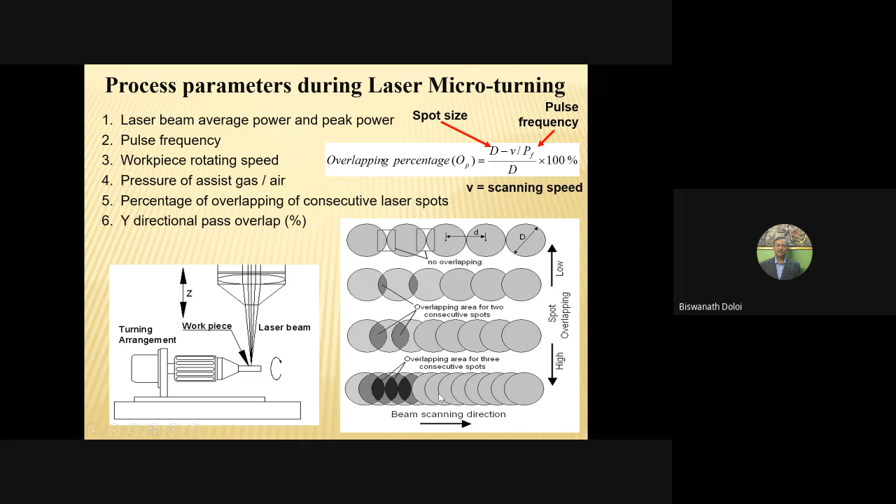Here you see percentage overlap 0, no overlap. These are the laser spots coming. But if you reduce the scanning speed, then there will be overlapping, so you can increase the overlapping. In this way you are increasing the spot overlapping. So percentage overlapping should be more than 50% for effective or efficient machining purpose.

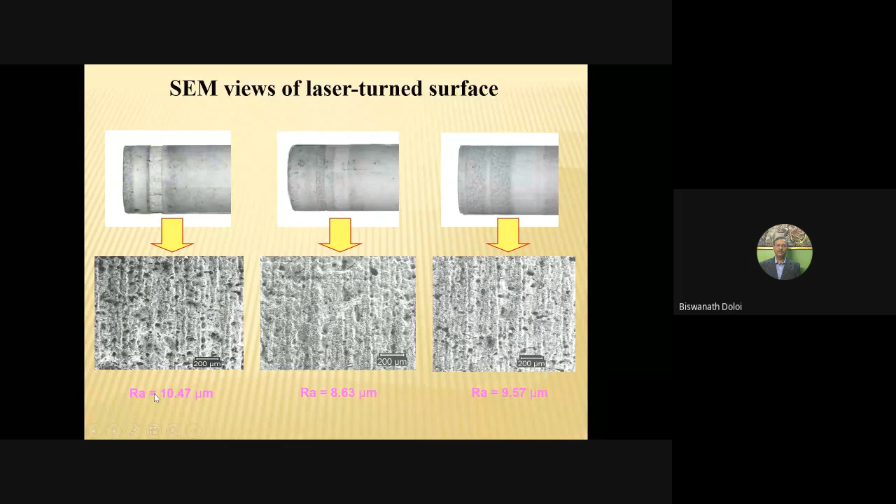Now here we have turned a ceramic workpiece material, and here we observe rough surface RA value, here you see 10.47. But if you want to reduce the surface roughness, we have to defocus it. Sometimes we require intentional defocusing to improve the surface finish.

But required surface roughness is also important for some applications, say dressing of the grinding wheel, cylindrical surface dressing. So for that we require a rough surface.

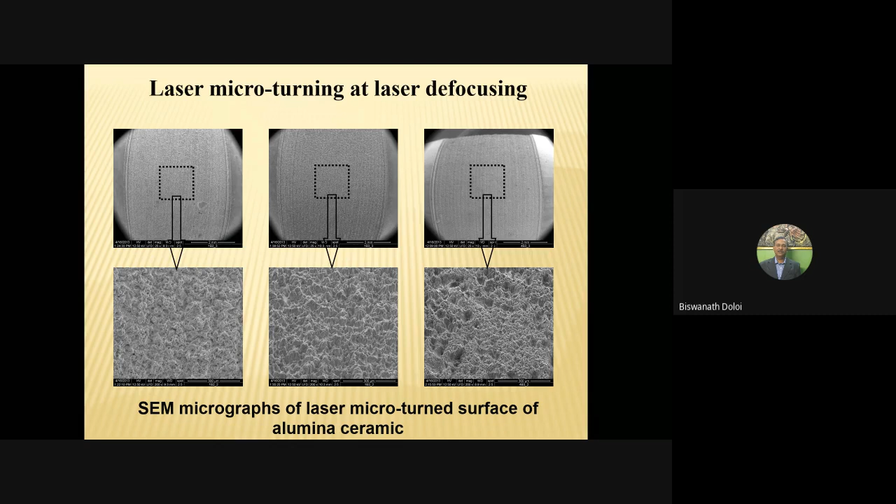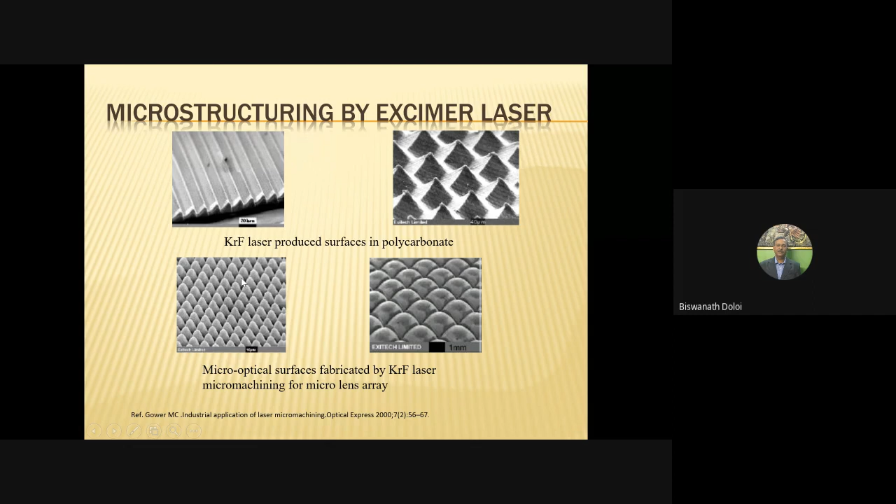These type of structures are needed for making micro lens arrays, where a number of lenses are to be fabricated, and this type of lens can be fabricated by excimer laser. So this type of array of different structures can be fabricated.

Now laser marking, as I told, there are two types of marking. One is marking by surface removal, that means by removing the material you can mark, or by modifying the surface you can mark. There are certain lasers and certain material combinations where, when the material is subjected to laser beam, its color is changed. By changing the color, you can mark the surface, or by removing the material you can make one line.

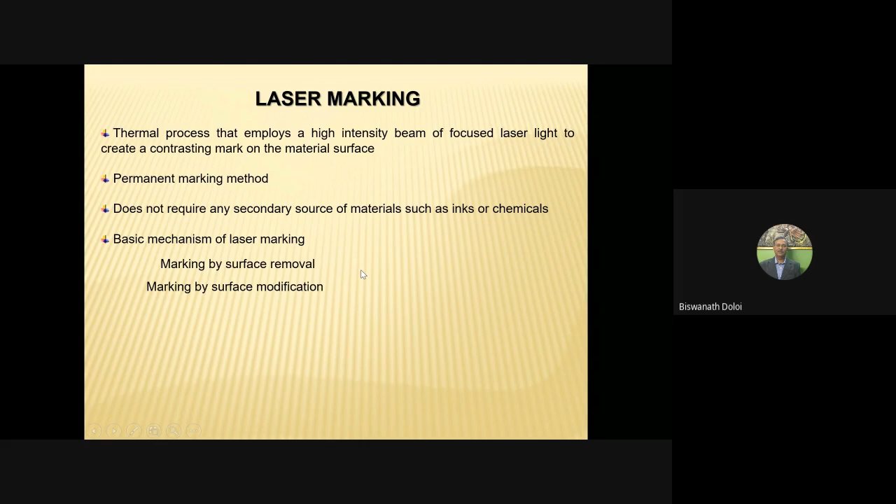But for marking, one thing is important in the system: the laser beam should be moved or tilted. So there is a galvanometric scanner. By this you can tilt the laser beam, and that is required for marking.

Now again, for marking, spot size is important, and then scanning speed you have to control to achieve this overlapping. So here for marking, the percentage of overlap should be more than 60%. Higher the percentage overlap, better the marking quality.

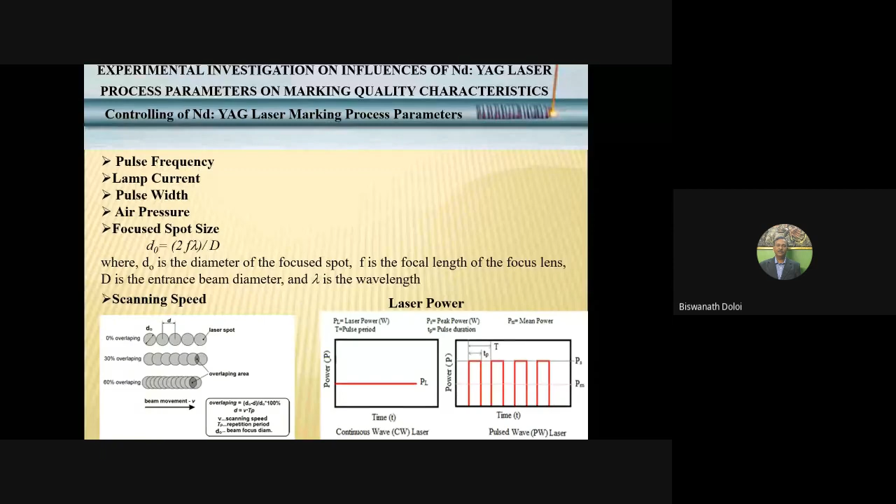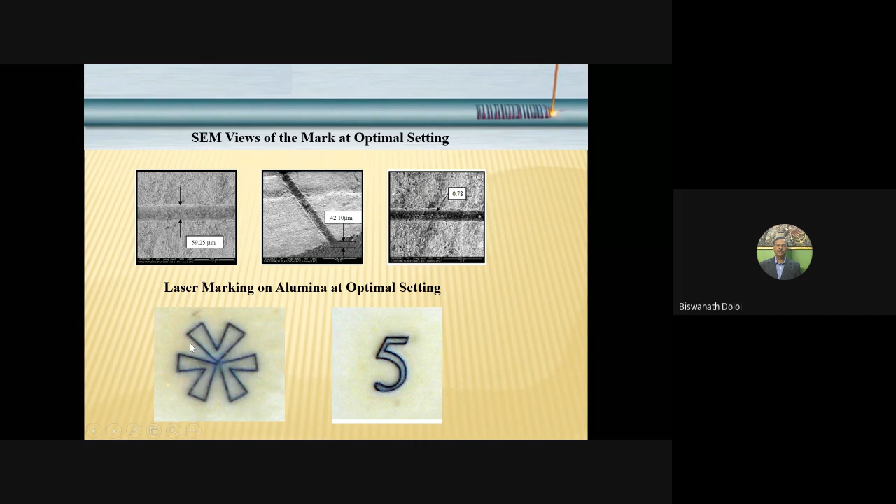So this type of mark is possible, mark of different logo, letter, number, etc. This type of logo, on zirconia. Zirconia is also a ceramic material.

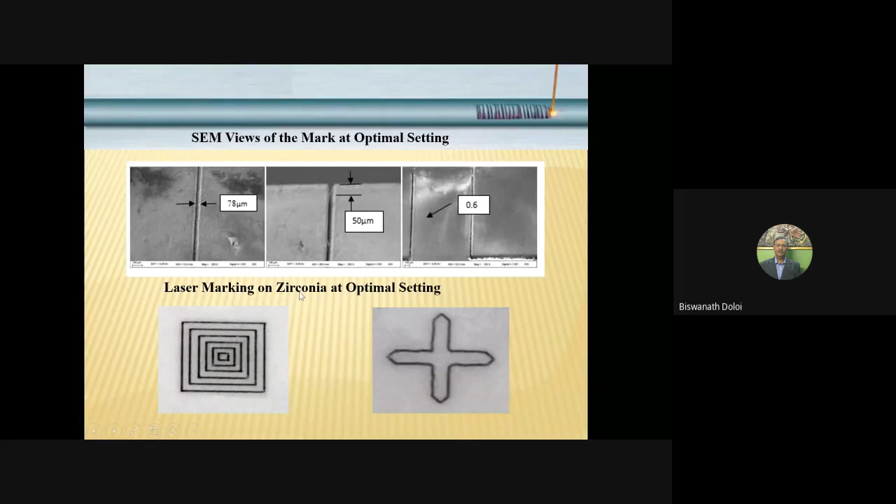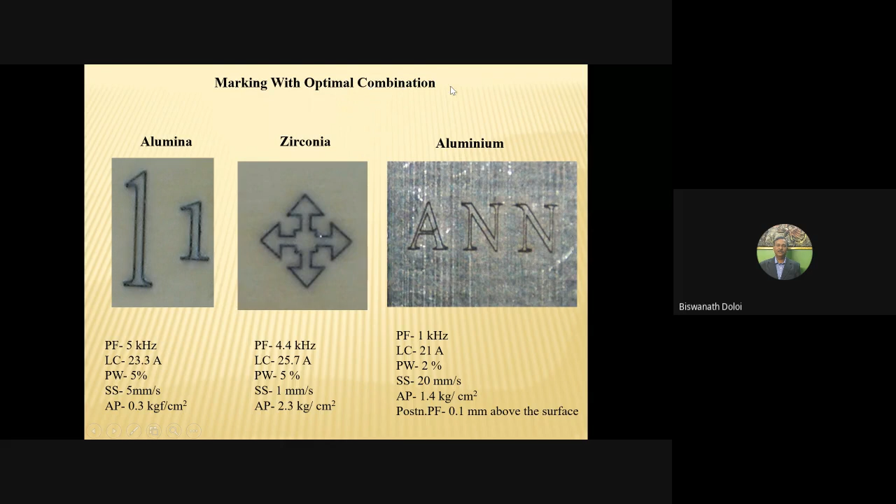Now, alumina, zirconia, aluminium - so we have marked these materials and also we have optimized the conditions of machining.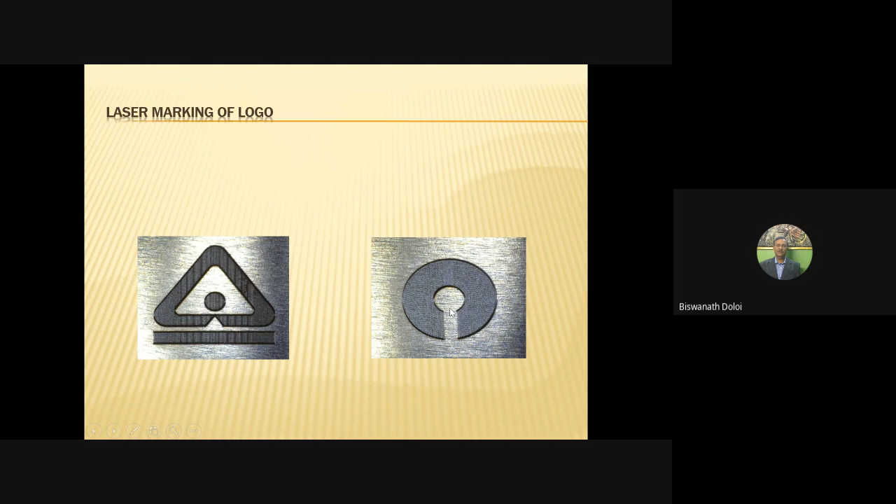Now this type of logo you can mark. We have tried to make the hallmark. In the jewelry industry, laser marking is very common nowadays. So this type of mark on metal, stainless steel - we have marked this logo, hallmark, or SBI symbol, on stainless steel. Okay, so laser writing of 2D data matrix.

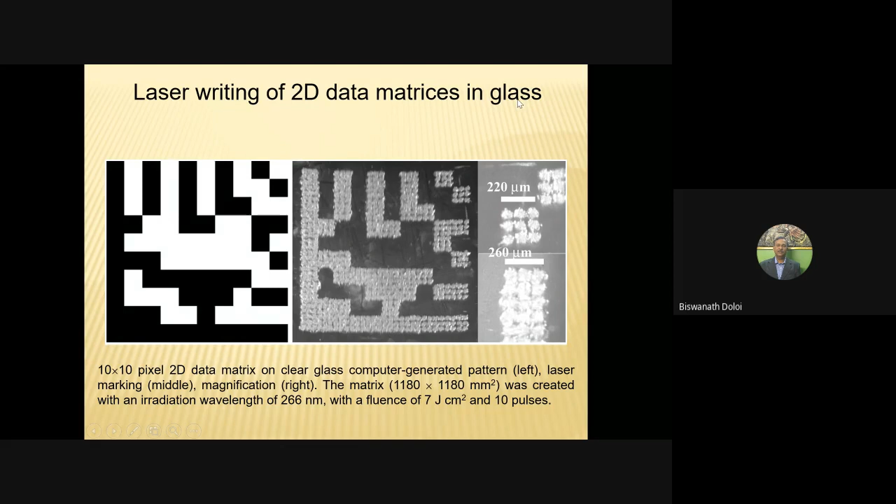Now laser dressing. Dressing is required to avoid the problem of loading and glazing of the grinding wheel. So mechanical diamond dresser can be used, but laser can be applied for assisting this dressing, mechanical dressing process - so laser assisted dressing or directly laser dressing.

So laser can be applied to remove the ground chips, or it can also dress the abrasive grain to actually remove the bond and expose the abrasive grain, fresh abrasive grain, and it can also remove the ground chips loaded on the gap between the two grains.

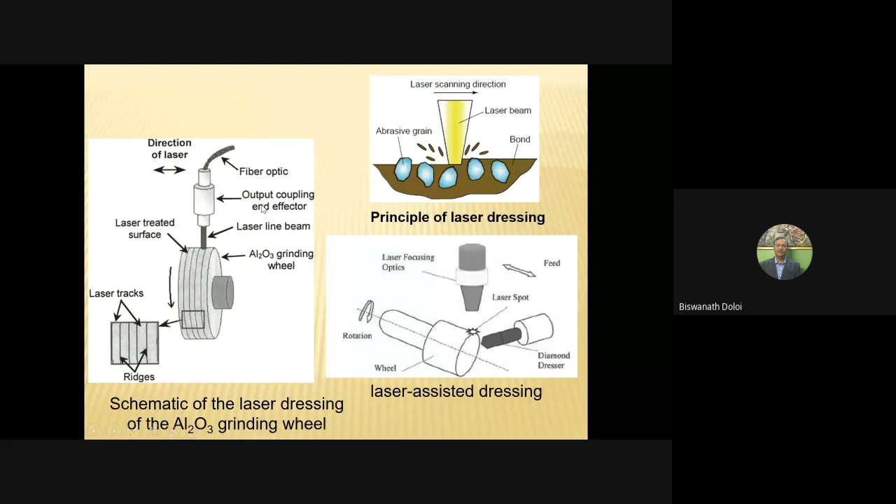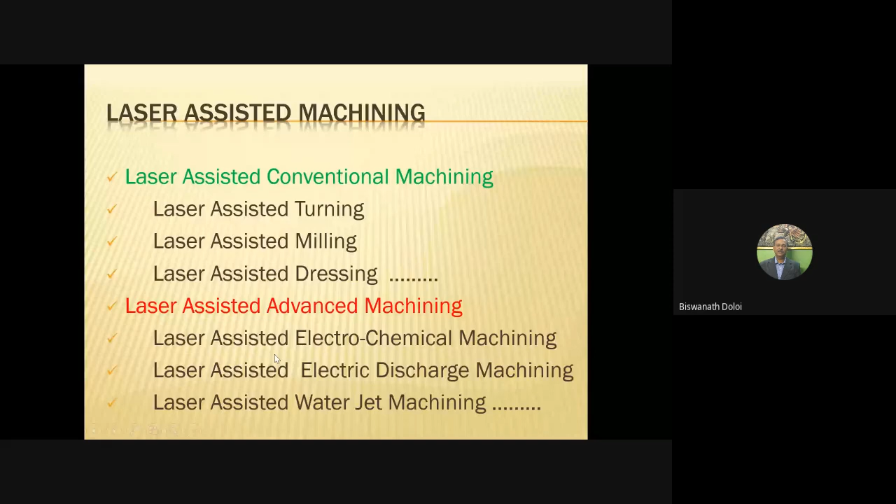But laser assisted advanced machining includes various advanced machining like electrochemical machining, electric discharge machining, water jet machining, etc., where you can use laser beam to assist the machining process. So these are all hybrid machining processes - assisted hybrid machining process.

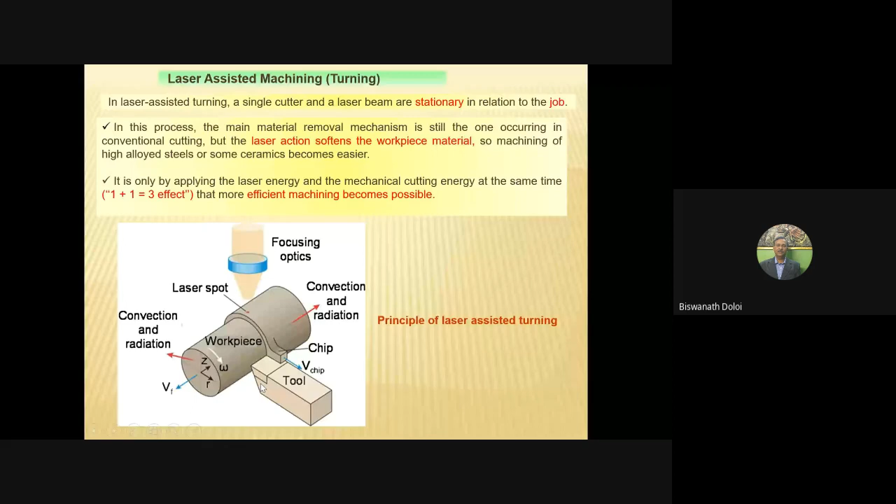Now laser assisted turn mill. So you can use a milling operation, but before that the laser beam is applied, it will soften the workpiece material and then it will be easier to mill the surface. So there's reduction of cutting force - you can reduce the cutting force and you can improve the surface roughness.

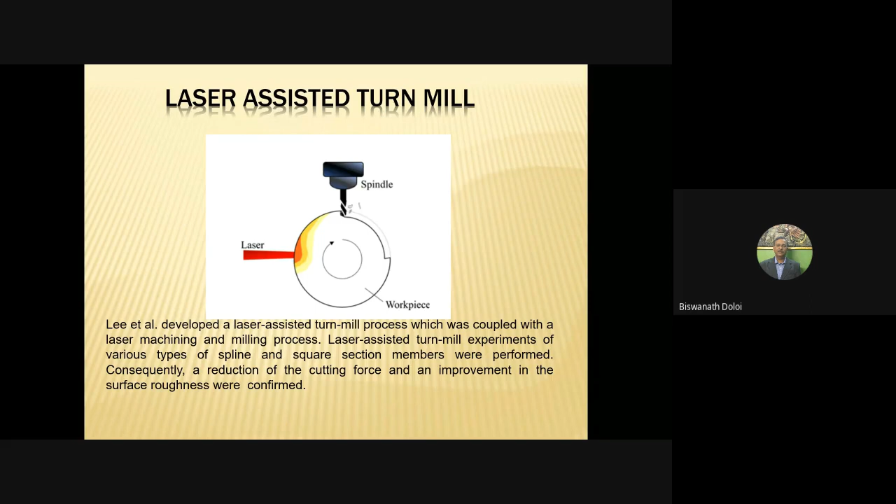So a large amount of material can be removed, and initially you get the shape. After that, you can perform finishing operations using EDM. Here the laser is used with a very high ablation rate, but EDM is used for finishing. By using EDM you can remove the recast layer developed by the laser. So this combination is laser plus micro EDM.

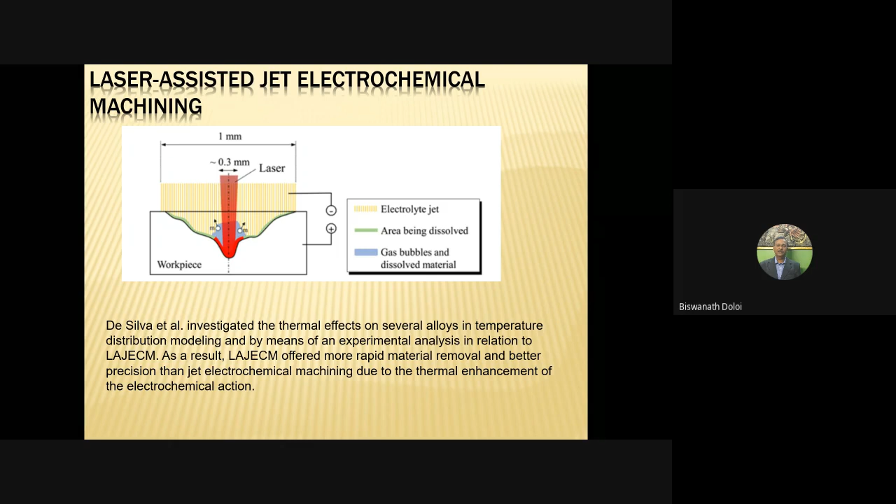Similarly, laser plus ECM, or laser assisted jet electrochemical machining. This is another area where jet ECM is applied, but along with the jet, laser is supplied. When laser is applied, temperature increases and there is enhancement of the rate of chemical reaction. As a result, material removal increases. So that is another combination, laser assisted jet electrochemical machining, where material removal rate, precision and accuracy can all be improved.

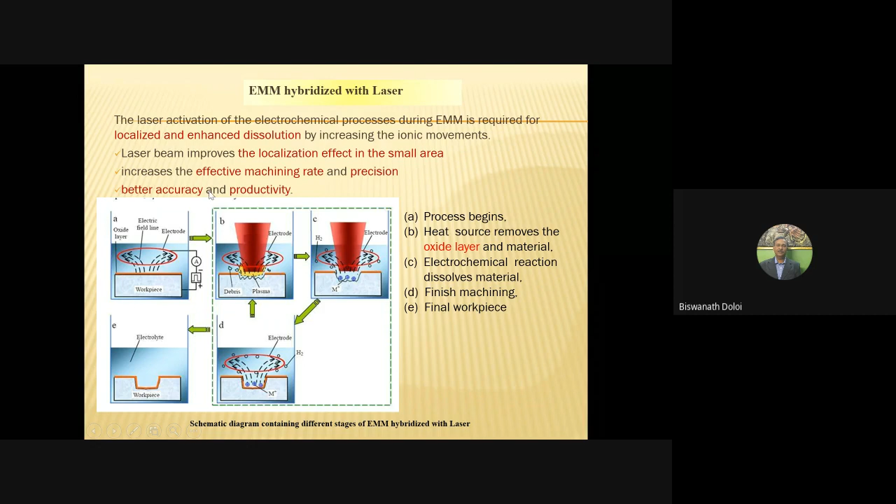If the laser beam is applied, there is a localizing effect. The laser beam improves the localization effect in a small area, increasing the effective machining rate, precision, better accuracy and productivity. Now, laser assisted water jet machining.

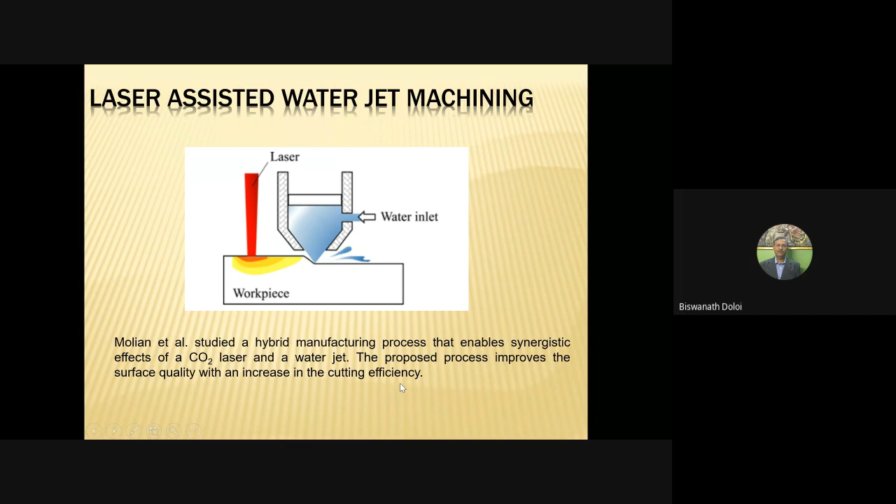Here the laser beam and the water jet are combined, CO2 laser and water jet, improving surface quality as well as cutting efficiency. The laser beam passes through this nozzle along with the water, and there is internal reflection at the water-air interface. Researchers have recorded results showing that surface roughness can be in the range of 150 nanometers for the laser microjet process.

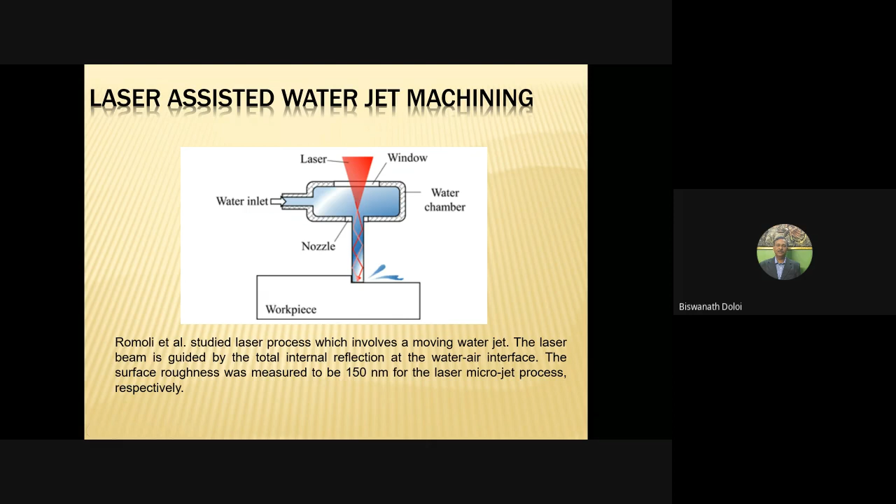So there are various combinations for laser assisted machining. Finally, for machining applications, different types of lasers can be effectively utilized: CO2 laser, Nd:YAG laser, fiber laser, diode laser, excimer laser. There should be proper selection of laser micromachining process parameters as well as the laser type, and optimization of process parameters is very much needed to achieve high dimensional and geometrical accuracy for advanced machining applications.

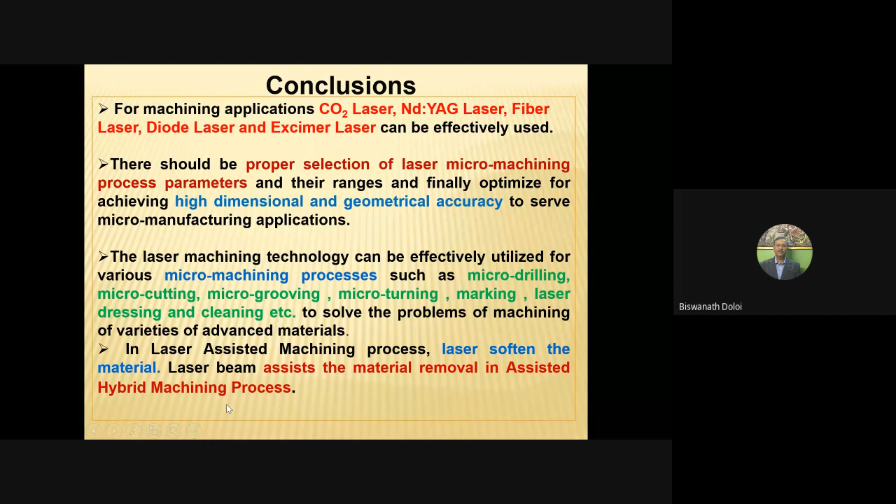Laser machining technology is widely used for micromachining applications: micro drilling, micro cutting, micro grooving, micro turning, marking, laser dressing and cleaning, etc., for varieties of advanced materials. In laser assisted machining processes, the laser softens the material and the laser beam assists material removal in assisted hybrid machining processes. Now these are the references.

So you can consult this book for advanced machining as well as laser beam machining. Thank you, I have taken extra time, sorry for that.